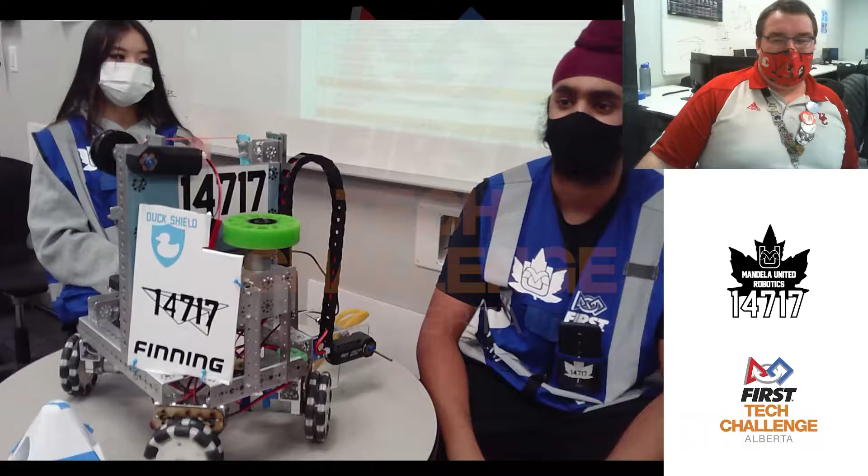Hello FTC Alberta, and welcome to your robot inspection how-to, so to speak.

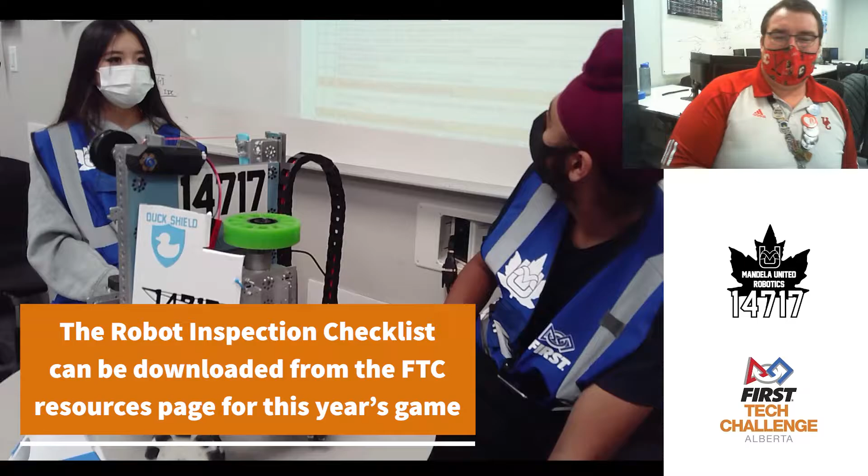They also have their team shipping element on the table as well. And lastly, they have some way of measuring the overall specifications of the robot. Tape measure in this case, but if any of you have a sizing box, that would be more than effective as well. So, welcome Team 14717 to your robot inspection. I'm Mitch, and we're going to go through the inspection.

Before we start, do you have any questions, anything that you're not sure about in the inspection, or can we get started? Can we just use the box? Can we use the scoring box, the sizing box? We're going to check the sizing box, we're going to check the tape measure, because both of those might be relevant to teams, all right? With that being said, I'm going to go through the inspection checklist.

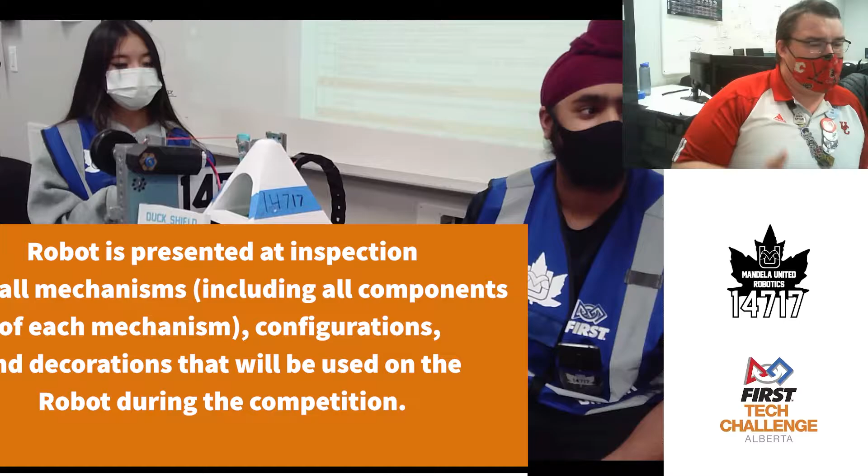The first piece is the robot is presented at inspection with all mechanisms, including components, configurations, and decorations that will be used during the competition. Is this the case? We need to duct tape more stuff on it. We need to duct tape more stuff on it, he says. At the point of the inspection, you should be looking at your robot pretty much as it is going into the competition. All right, we're going to test the robot with all of its different configurations, and in this case, this robot only has one configuration, clearly, and we're going to make sure that it fits within the sizing tool.

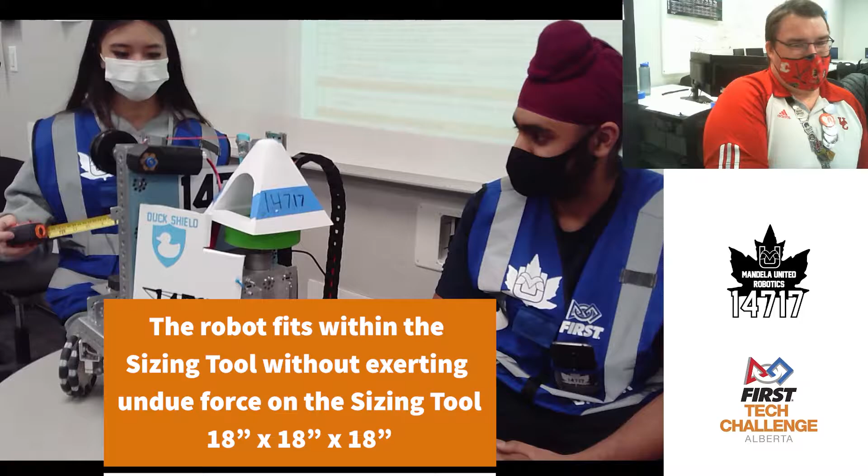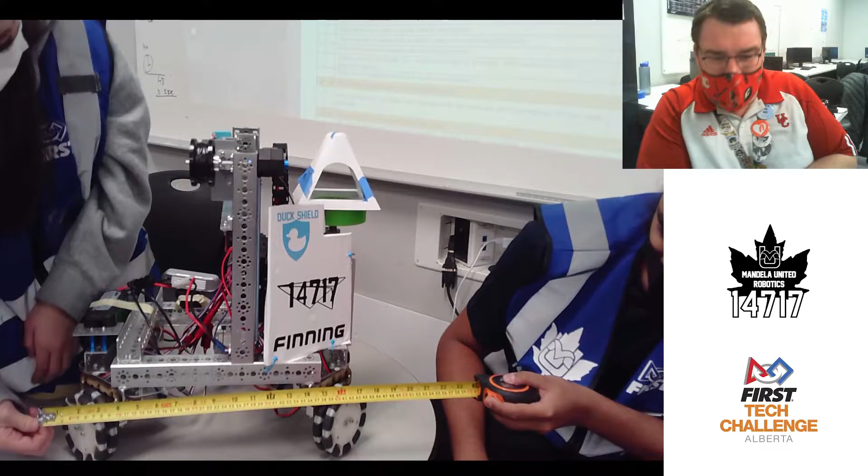Vivian, can you just open up the tape measure there and show me the long edge of the robot, that it is less than 18 inches across? Okay, Arsh, can you turn the robot around about 45 degrees there, so we can see that on the camera? Okay, show me that we have less than 18. Now you guys might have a camera here when you're going through inspection that doesn't quite have the resolution to actually show this, and you may need to move the camera closer to the measuring tape itself. Okay, so pull it out beyond the wheel a little bit there. An X-Drive has a bit of a weird setup, and I can see that that robot is very close to, but just less than 18 inches.

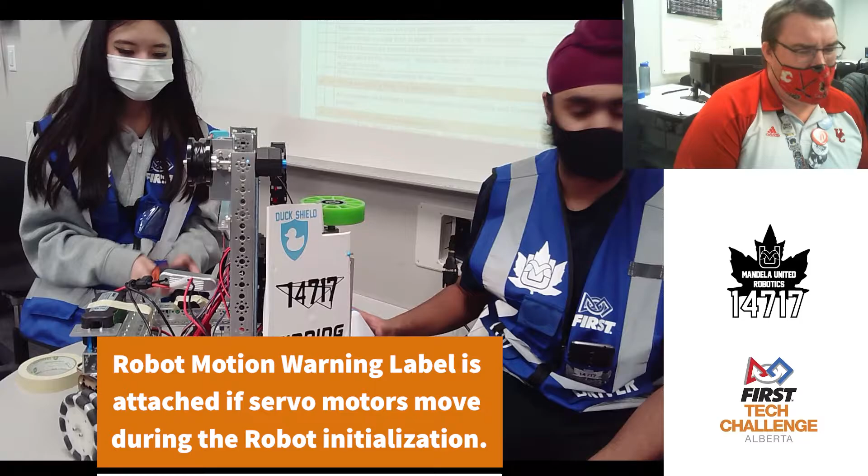Can you guys show me a height measurement as well, just to show that it's under 18 inches? Oh, yeah. All right, it is just barely under 18 inches. I can see that clearly on the webcam, and life is good from there. All right, so now we're going to the size inspection. There is a warning label if servo motors move during robot initialization. Do you have servo motors on your robot?

No. Now, some of the things in this checklist in the inspection might be a piece where they aren't actually on the robot. For example, this robot does not have servos on it, which means a lot of the pieces that talk about servo motors we don't have to go through. We can actually skip over some of those. And this is going to happen in some inspections.

Now, if you do have a sizing box, which we do in the room here, Harvey, can you grab the sizing box over there and just toss it over the robot? Just send it over. So, no. Let's not throw the plywood one here. All right. Some teams have sizing boxes, or perhaps you have the AndyMark sizing tool that you can use to show the robot inspector. That's all good. There's nothing wrong with that, and you can test that during your robot inspection. Do you guys just want to show how to use the sizing tool here in case you do have a box? Might be a two-person job in this case.

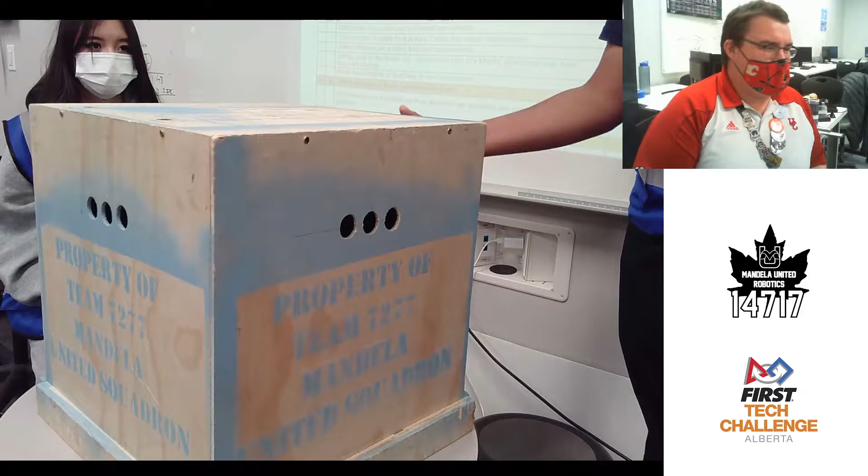No, I got this. All right. You take the box, and you just put it over the robot. And you make sure it... As an inspector, what I'm looking for here is that the robot doesn't produce any undue stress on the sides of the box. So Arsh here is to pick up the box and lift it up. His robot should not come with the box, which it does not, and we're good. We can roll on from there.

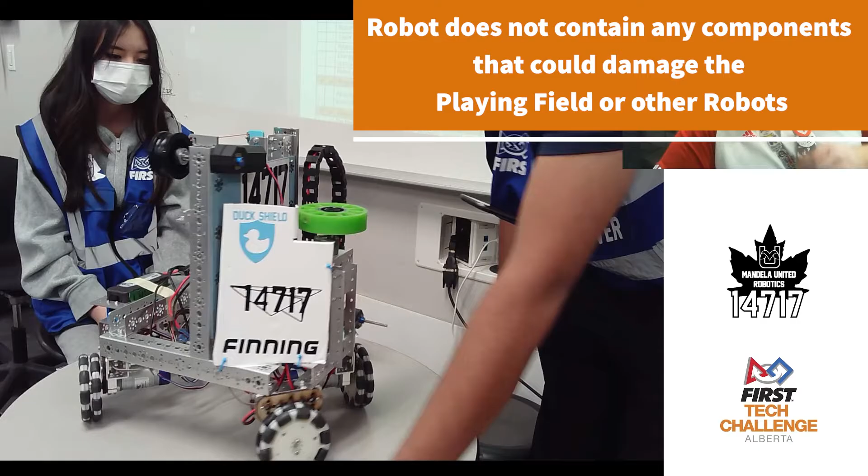Now, the next section here is just the general robot rules. And I'm going to get Harsh to actually spin his robot around on the table. I recommend not rolling the wheels because you can cause damage to your control hub, to just show all of the elements of the robot and make sure that they are securely attached, that they're not going to damage the field. Let's go through the checklist.

The robot doesn't contain any components that could damage the playing field or other robots. In this case, I'm looking at this thinking that for the most part this isn't bad, but he's playing around with a wire that could hang out and could get snagged on something. Okay? Oh, wait, is that camera actually securely attached? No, the camera is taped on. There is no camera anymore.

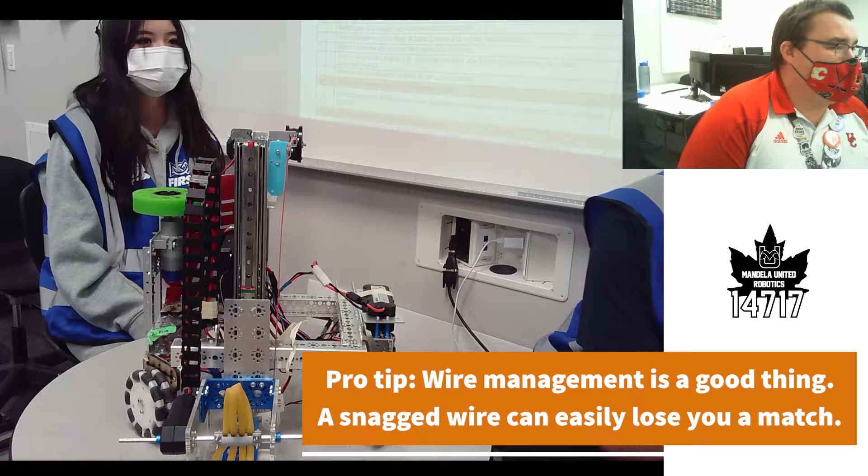Move on. Highly recommend, guys, that when you're going through your actual inspection, that any pieces are securely fastened to your robot, all right? It's nice to think that you're going to duct tape pieces onto your robot, but it's not best practice. In some cases, we can let you play with those things on there, but if you've got some time, make sure you do it properly and bolt it down correctly.

The robot does not contain materials that are hazardous. I'm looking at this robot. I'm looking for basic components. I'm looking for the standard battery, control hub. Nothing on this robot looks particularly dangerous. I don't think we've got any radioactive materials either.

The next thing we have is that there's no risk of entanglement, and we've obviously already addressed one of those pieces. I'm looking at some of the wire management on this robot, thinking to myself that this is good. I don't think anything's going to entangle, but they could definitely do better. And some of your robot inspectors will make a comment saying that the wire management, if we look at the middle of this robot, definitely could be improved. We could tie things off to different bars, or we could make it so that they're not as dangly or bird's nesty, as we often say on these things.

All right, there are no sharp edges or corners on this robot. This is a piece where your robot inspector may have you just feel parts of your robot or show particular pieces. On this robot, the pieces I would be concerned about are right on the front of the robot where we see those acrylic pieces. And I'm going to ask you guys, can you just run your hand along the front of those acrylic pieces? Are there sharp edges or have they been rounded off? I'm pretty sure they're rounded off. And I can't see that on the camera, but I can ask that of the team. So you may have a point where you have to show that to an inspector. You may need to zoom in with your camera.

All right. We have no animal-based liquid or gel materials on this robot. Is this correct, team? We have a duck here. Where's the duck? All right, we appear to have a duck sticker. That is not animal-based, though. That is purely vinyl-based, and we're good to go on that one.

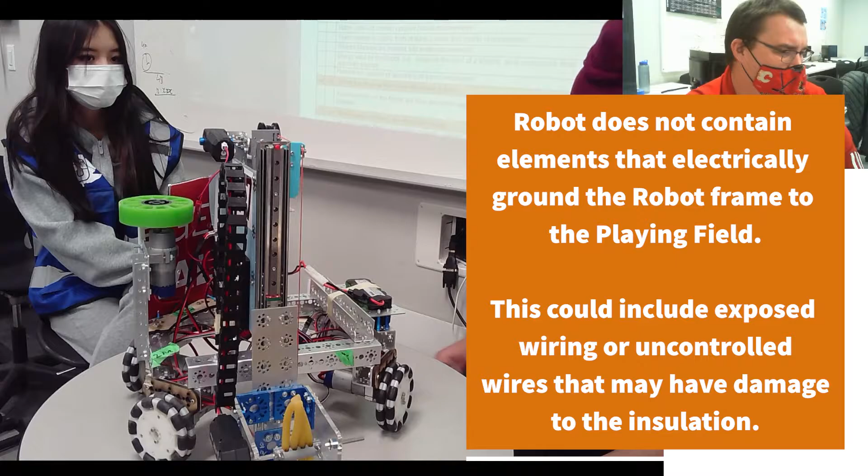There are no elements that electrically ground the robot frame to the playing field. In this case, I'm going to ask if your electrical system has any exposed wires or any custom connections. Does your robot have any custom connections on it? I mean, besides the split, it looks like it does, actually. So in this case, can I ask you guys to spin that around and show the connection, and I'll just get you to answer what happened with that one.

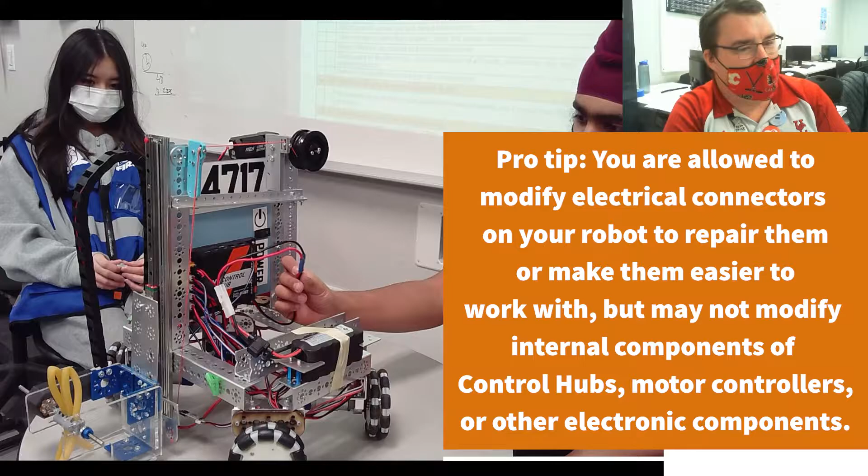This one? From my piece, I could see two pieces of blue on that. What happened with that, with your electrical connection? Stuff happened, and we fixed it. Okay, so we had broken wires on this part of the robot, and you guys actually fused those together. Yeah, same as here. We're going to look to see that there's no closed gas devices, hydraulic devices, vacuum-based mechanisms, which yes are illegal this year, on the robot.

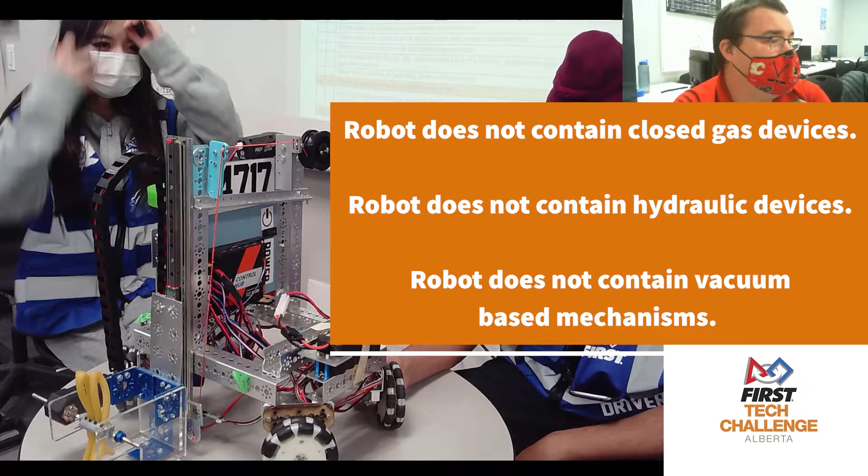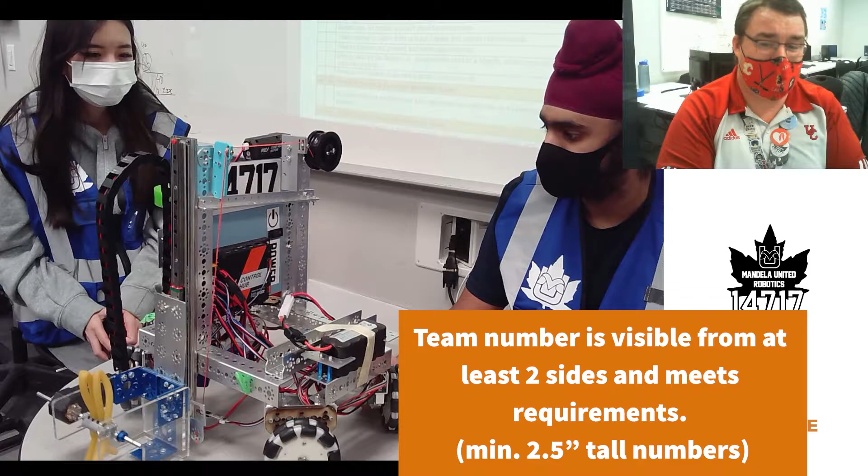Okay, are there any of those things? No. Fantastic. The team number is visible from at least 2 sides and meets requirements. Requirements are that the numbers are 2.5 inches tall on this particular robot. Can you show me this side of the robot? Can I clearly see that it's 14717? From this angle, it's a little bit obstructed by that bar, but if I'm standing and looking at this on a field, I will accept this, absolutely.

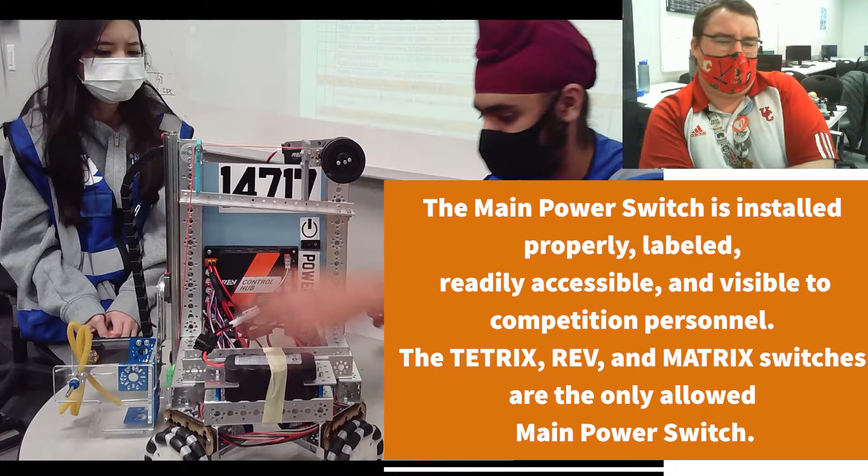Also, I want to note that in this orientation, I can also see that the power button is very clearly marked there on the side of the robot. Spin around the robot and just show us the other side. Do we have team numbers clearly marked on the other side? We do, actually, in multiple places in this case.

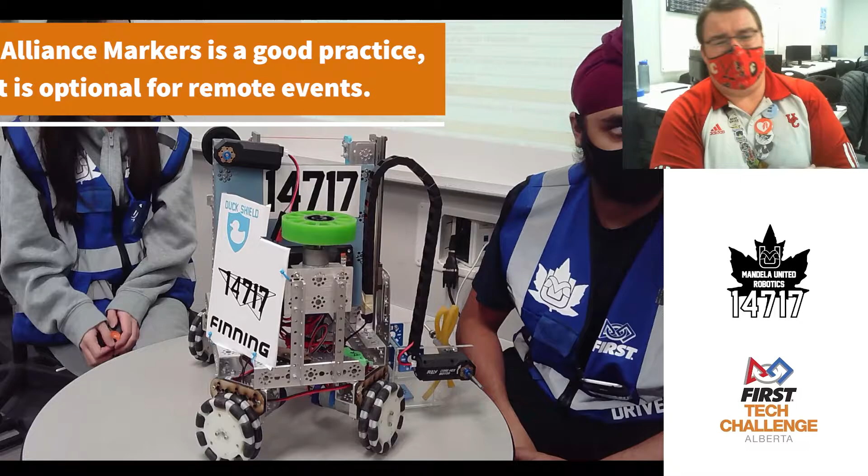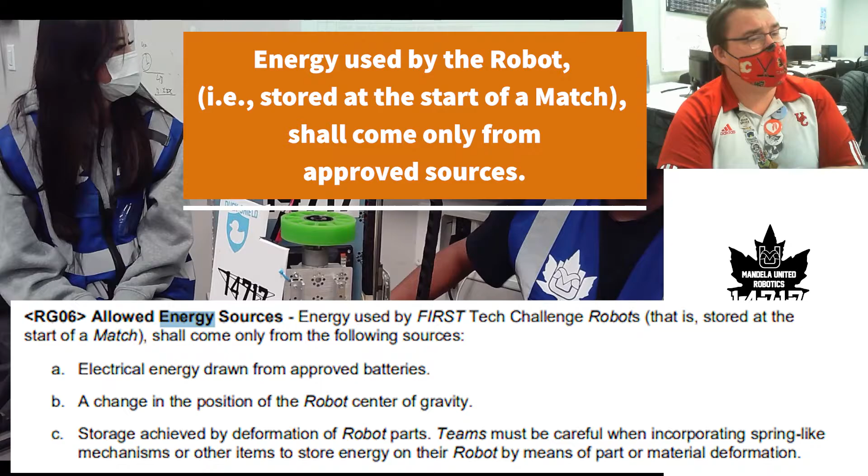Alliance markers: in this case, we are preparing for a remote event, so the alliance markers aren't actually that important because there's no red and blue side of the field. But if you're doing a traditional event, absolutely make sure you have those markers. Energy used by the robot shall come only from approved sources. There's only the one battery on this robot. Is that correct? Yeah. Awesome.

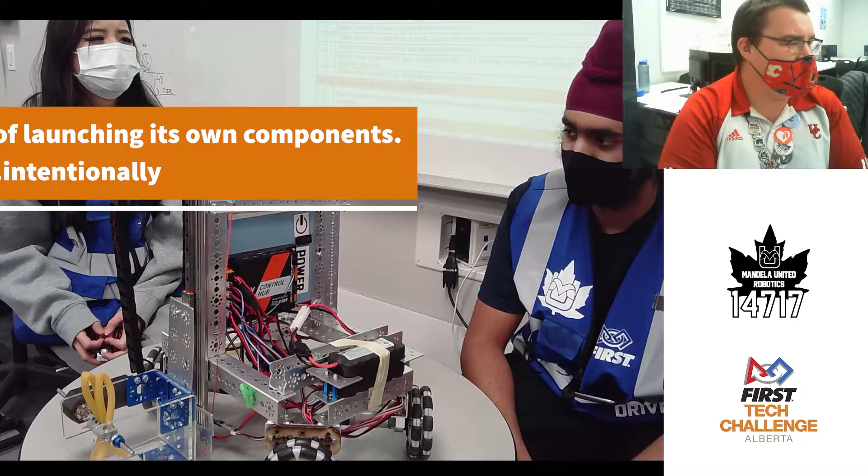Okay. The robot is not capable of launching its own components intentionally, I will add. Does this robot launch its own components intentionally? Not intentionally. That's the answer I'm looking for as a robot inspector. Piece falls off, that's on you. But if you're actually using a grappling hook, that's on you. Okay, that's another problem that we can actually address here.

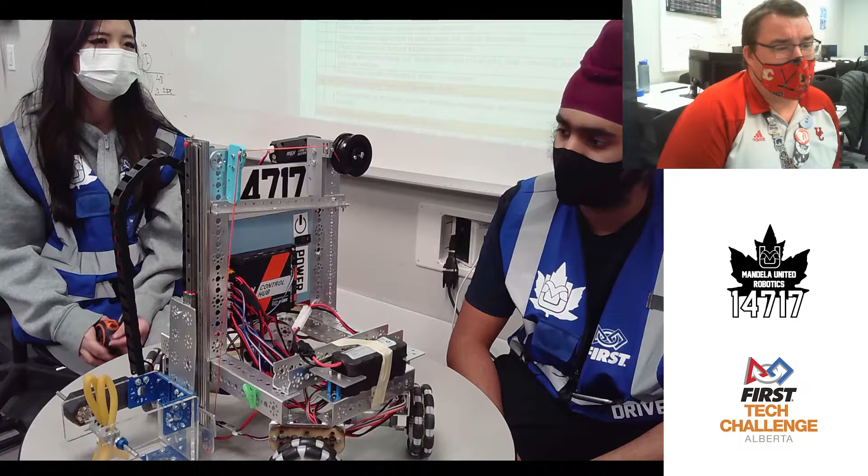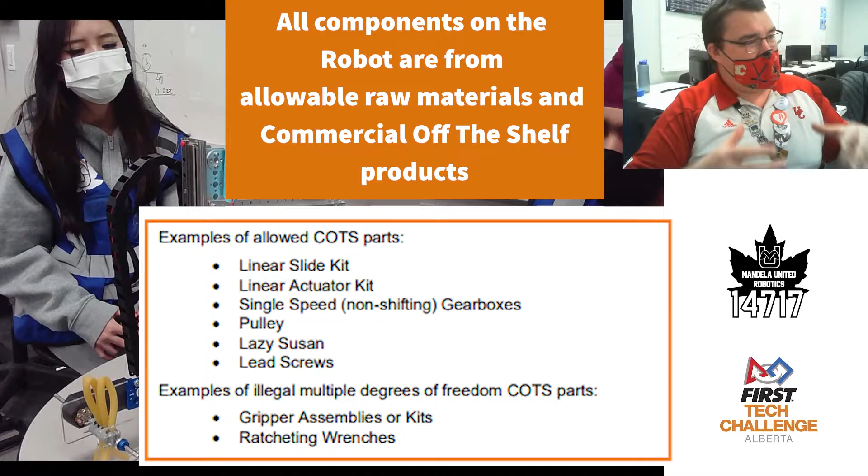So the main power switch is installed properly. All components on the robot are from allowable raw materials and commercial off-the-shelf products. You guys don't have any mechanisms that are pre-built on this robot, like a gripper that we bought as a kit, or any pieces that were prefabricated for you. Is this correct? No. We have the Tetrix channels and stuff.

So Tetrix channels, all of the pre-built kits, Tetrix, Studica, Rev, whatever, these are all legal as commercial off-the-shelf parts. They are not pre-built kits. You assembled the individual components. Yeah. They came one by one, and they are available to all teams, which is fine. If you have a pre-built gripper kit, let's say, and there's a few versions of those out there, that a company has pre-designed and built that has more than 1 degree of freedom, those actually aren't allowed in FTC.

On to electrical. The main power switch is installed properly, labeled, readily accessible, and visible to competition personnel. And the switches, you're using a Rev switch in this case by what I can see. Is that correct? It's all accessible? Yeah. Looks to be from my vantage point right here. All batteries are securely attached to the robot in a location where they'll not make direct contact with other robots or the playing field.

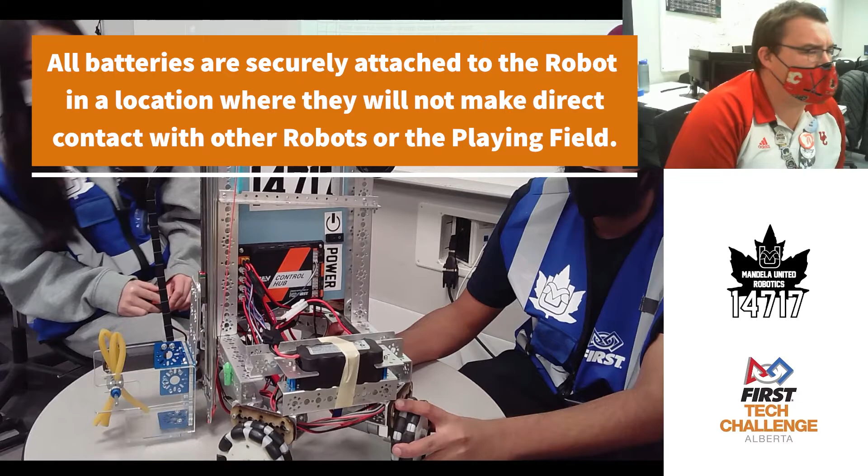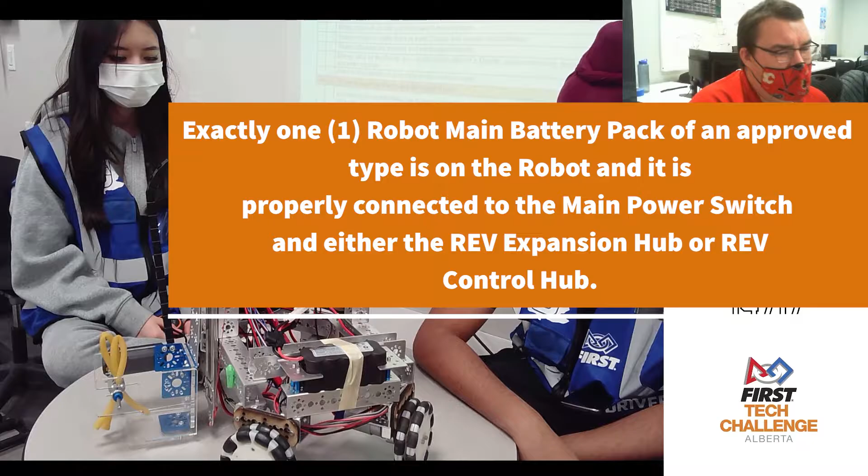Okay. Extra security. In this case, I actually have a battery that uses the Tetrix clips. I can see this is acceptable, and you guys have added a little bit of tape on top of it to prevent it from bouncing out if you do happen to go over the barrier, which is fantastic. Exactly one robot main battery pack is on the robot and is of an approved type. That is a Tetrix battery pack. Is that correct? Yeah. Absolutely, love it.

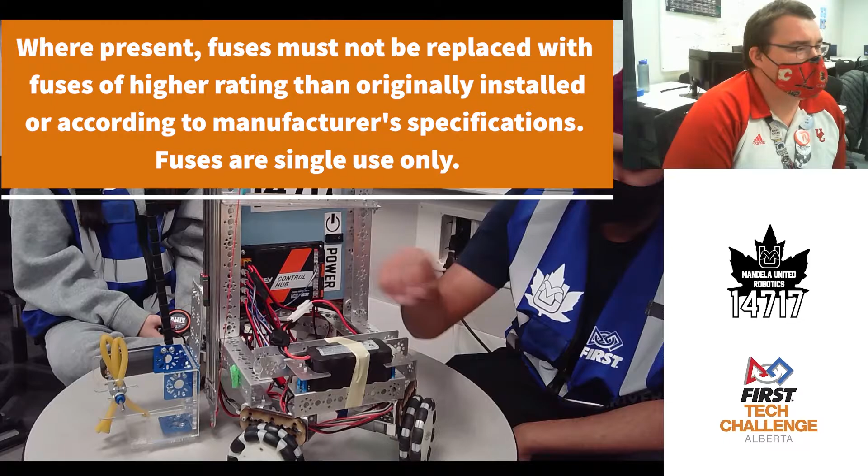Where present, fuses must not be replaced with fuses of higher value. Have you replaced the fuse on this robot ever? Nope. Fuse pack, can you point to the fuse package there, Arsh? Yes. Okay, the fuse package is right there. Occasionally we have had robots melt down fuses and you just need to replace them with the identical fuse to the one that you had before. Many teams will never have dealt with that, and that's all good.

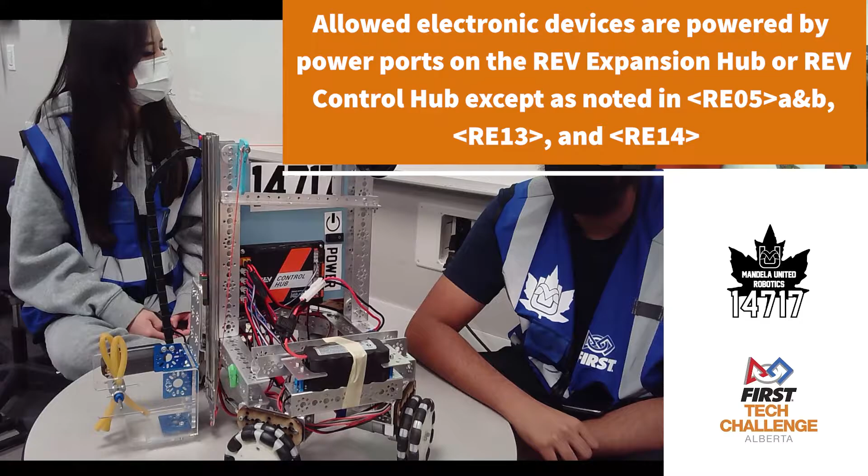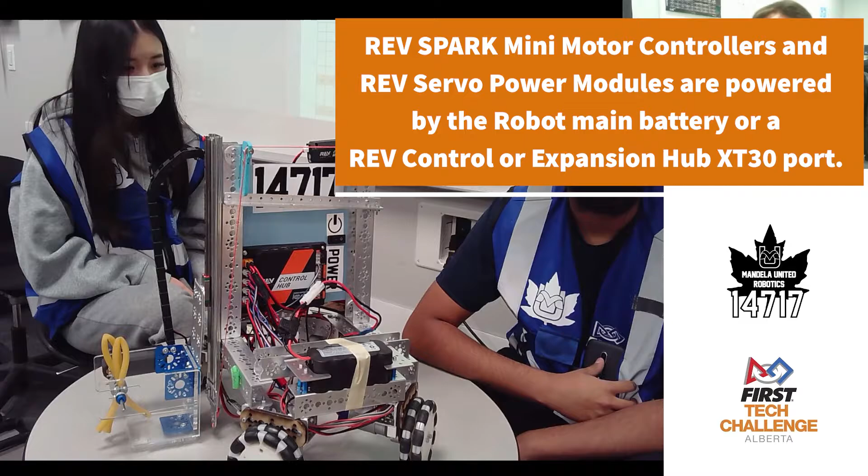Okay. Allowed electronic devices are powered by power ports on the Rev expansion hub or Rev control hub. You don't have any electrical connections except for those two devices. Is this correct? Yeah. They're only connected to the hubs. There are no Spark Mini motor controllers on this robot or servo power modules. Is this correct? Yeah, we don't have servos. Again, with some of these pieces on the checklist, if you guys are using these particular parts, just make sure that they match the rules in the rulebook.

Allowed sensors. Do you have any sensors on this robot as of right now? Nope. Okay, if you do have sensors, they can only receive power from the control hub or the expansion hub. Light sources are not focused or directed in any way except the Rev Robotics 2-meter distance sensors. Okay, light sources are powered by only allowable methods.

Are there any light sources on this robot that we should know about? The encoders, I guess, but... Okay, well, encoders wouldn't count as a light source in this case. They would count as a sensor. And if we're talking about light sources, if you do put LEDs on your robot, this is totally allowed.

This is all good, but they just can't be focused in any particular direction. You can't shine them in your opponent's eyes, is what this rule is actually saying. The video recording devices, if used, are powered by internal battery and their wireless communication is turned off. We don't have an external video source or camera on this other than the webcam that you might be integrating later, now that you took it off your robot.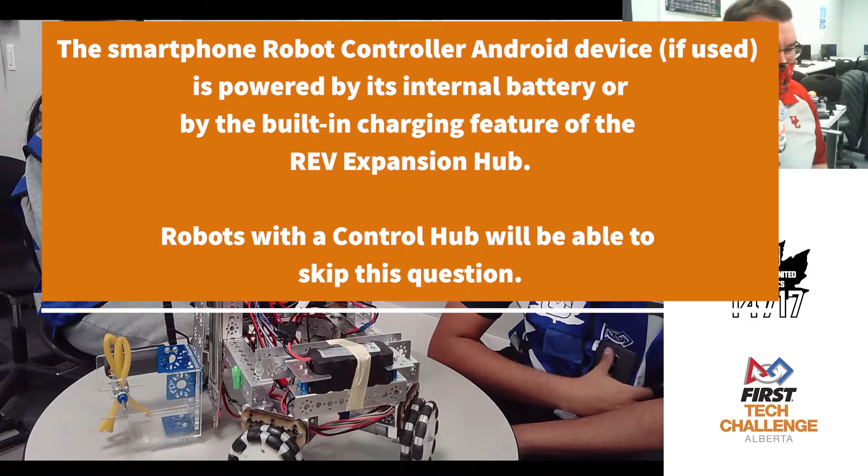Yeah. Correct? Fantastic. The smartphone robot controller Android device is powered by its internal battery or the built-in charging feature of the Rev expansion hub. We don't have a phone on this robot, do we? Only on our control station? Yeah. Fantastic. Okay, there's exactly one robot controller smartphone. Obviously, we've determined that this is not the case. Just one. So that's the one robot controller smartphone.

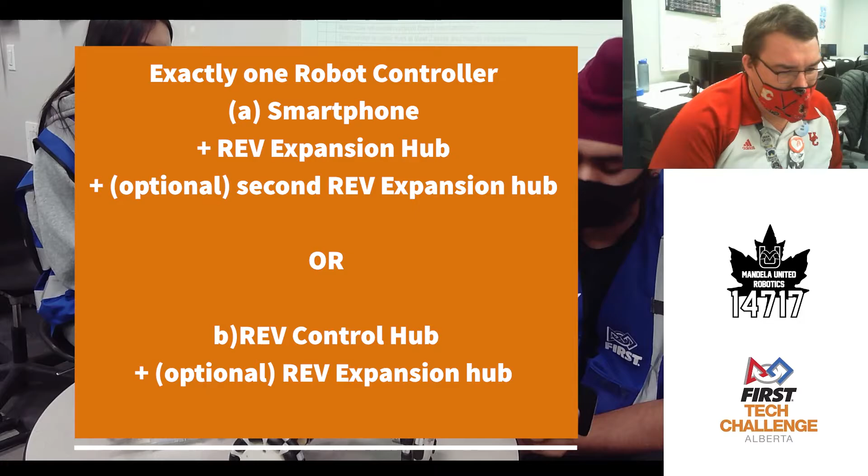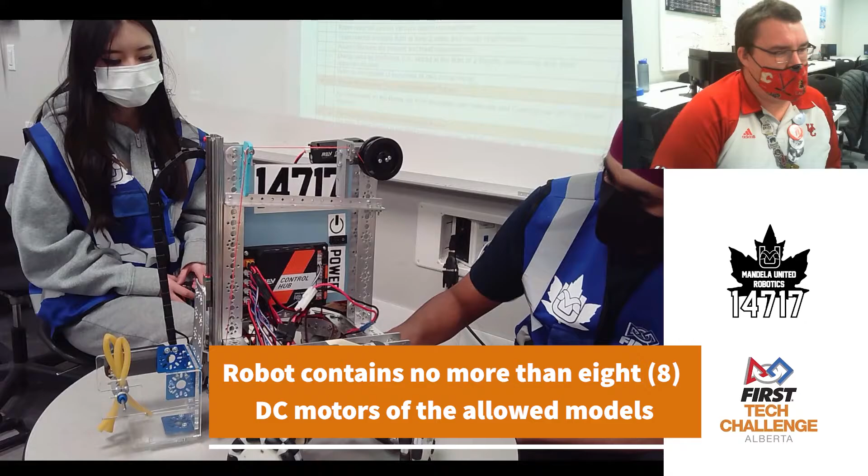The only allowed motor and servo controllers are Rev expansion hub, control hub, servo power block, Spark Mini motor controllers and Vex motor controllers. We've already determined that we're only using the expansion and control hub, so these pieces are all good. Again, if you have those pieces on your robot, please check the particular guide. Okay, there are no more than 8 DC motors on this robot. Is this correct? Yeah. And there are no more than 12 servo motors on this, and they are compatible with the expansion and control hub. Is this correct? Yeah, we don't have any servos, so that one's easy.

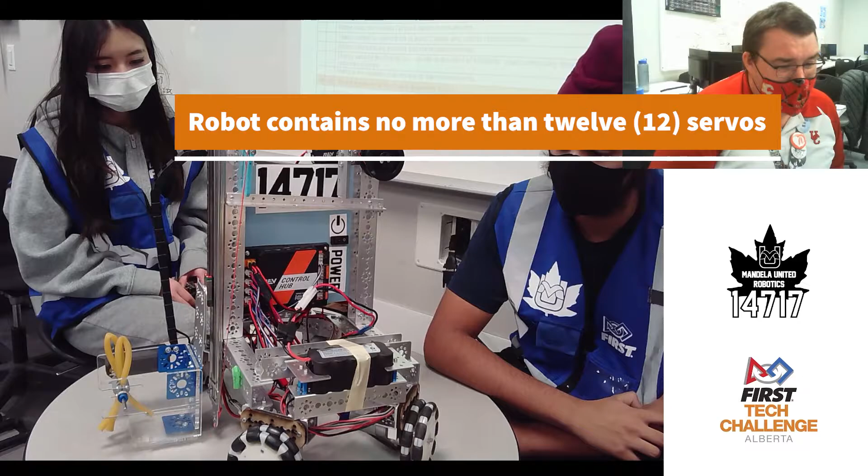Okay, we only use allowed sensors that are connected to the expansion and control hub. The power and motor control wires have not been modified in any way, and if they have, they still follow the convention of red and black power wires. Yeah, they're still red and black. Fantastic. And if you haven't modified your electronics in any piece of what you've done for building your robot, you don't really need to worry about this. The pre-built wires that pop in are all FTC legal according to how they're put together.

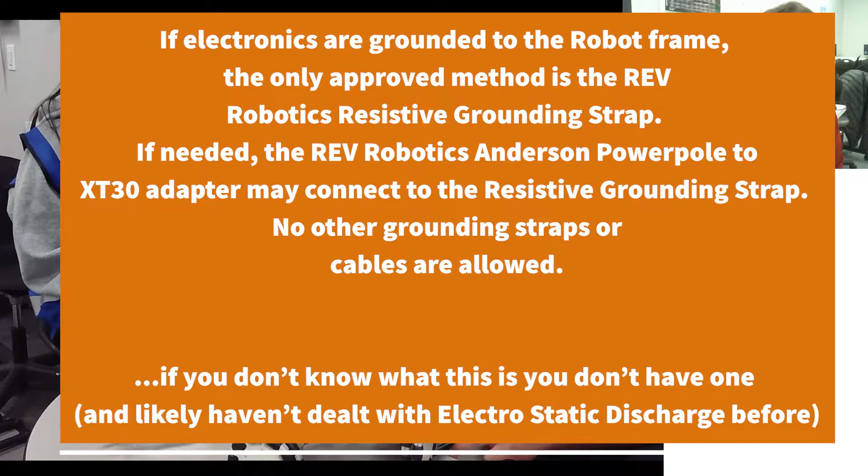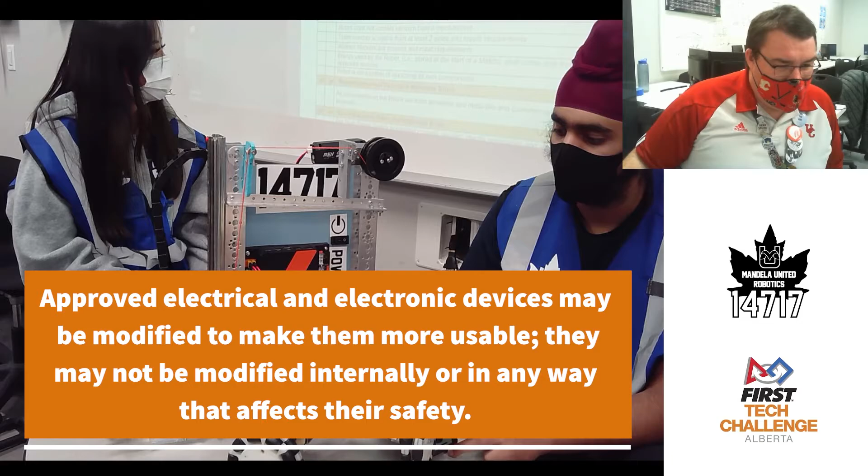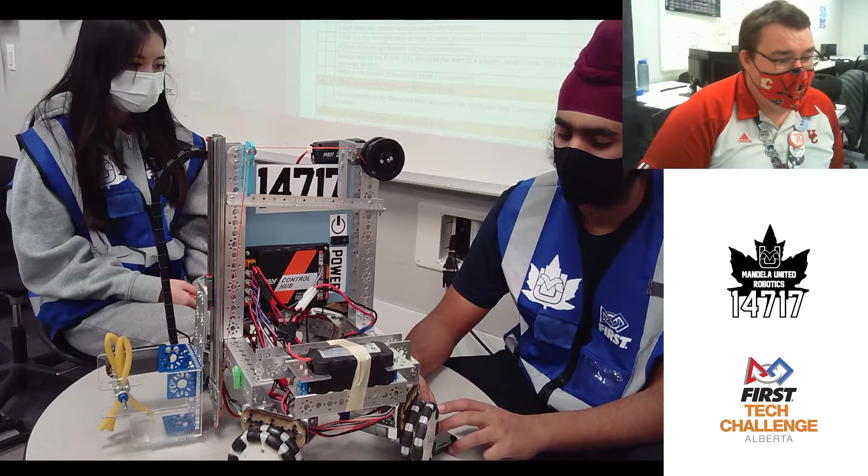Okay, here we go: if electronics are grounded to the robot frame, you're only allowed to use the Rev Robotics resistive grounding strap. You guys haven't grounded this in any way, correct? No. Fantastic. Okay, and all electronic devices can be modified to make them more usable, including replacing ends, things like that. You guys have obviously repaired a piece. They may not be modified internally in any way, so only wires can be modified. Okay, last couple things here. Your robot doesn't damage the playing field when it drives. Is this correct? Yeah. Seen a lot of Omni wheels here. There's nothing wrong with that.

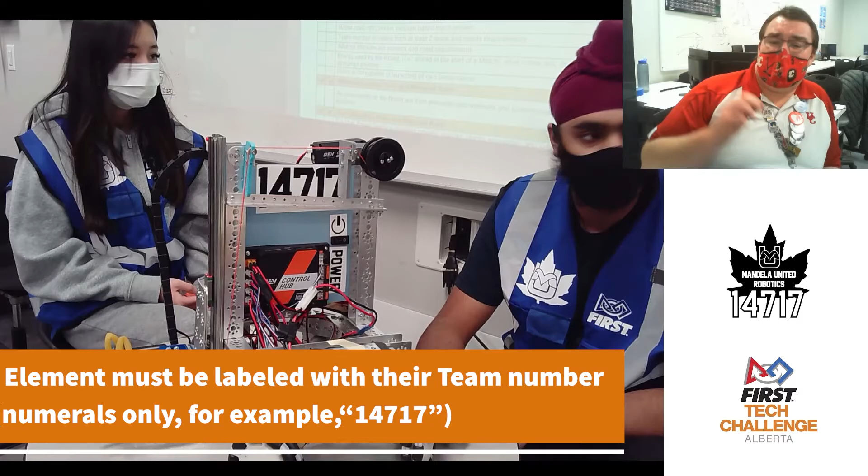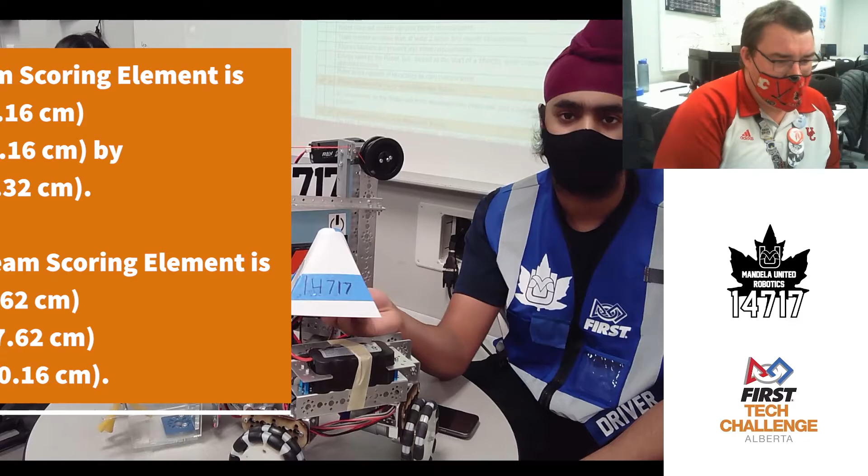Lastly, we're going to look at the team scoring element, because these do have to be inspected as part of your team. Can you guys show me your team scoring element? Fantastic. So we've got a 3D printed scoring element here. Excuse me. It follows the normal material rules. In this case, it's made out of 3D printing filament, so life is good. Maximum size for the team scoring element is 4 inches by 4 inches by 8 inches. Can you guys give me a quick measure on there?

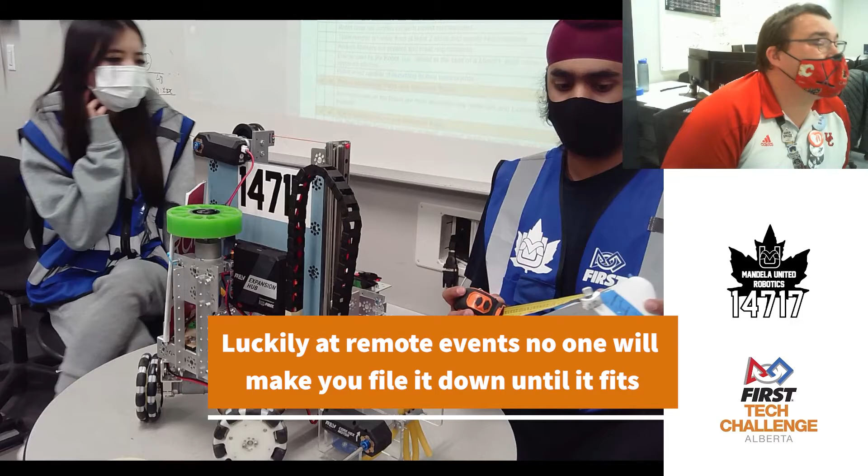Yeah. Now, I want to point out that at this point we found a couple things in this robot, and you're going to find that this one, turn it around so the camera can see it, actually was designed a little larger than it is legally allowed to be. In this case, as an inspector, we're going to ask that you can't use this element. This one, and I know this because I've been working in this lab, is actually 5 inches by 5 inches by some odd tall. If you have an illegal element like this, the inspectors are going to ask that you don't use it during that week's competition, or if you have it on your robot, that you fix it before you compete, which is really the point of these inspections at the end of the day.

So guys, overall, well done on the robot. I appreciate you taking off that camera and the piece that could cause entanglement. Obviously, you can't use your scoring element until you've modified the size to be correct. Yeah. And with all of that being said and done, good job on the robot. Good luck competing this week. Do you have any questions?

No. Fantastic. Now, my team doesn't know this, but this is the point you should thank your inspector. Your inspector will thank you for the interaction here, and we're going to wish you good luck and have some fun. Thanks. Thanks. Cheers, guys.

Appreciate it. Good luck roboting this week with the competition, and make sure that you've read the rule book, mind the details, and that you have a great time running your robot in the competition. Cheers.